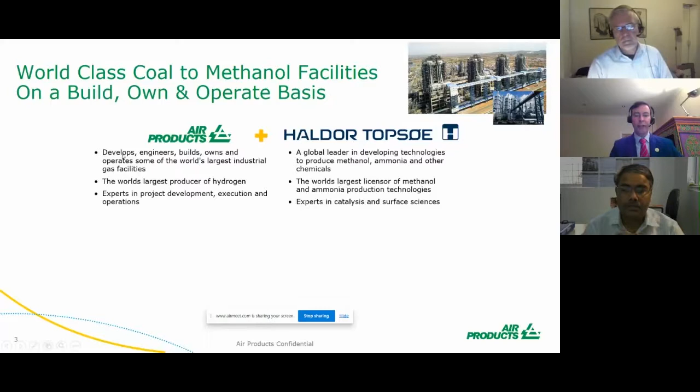I think you're very familiar with both the names of Air Products and Haldor Topsoe - we're both leaders in our own areas. Air Products is a significant producer of hydrogen worldwide. We own and operate some of the world's largest industrial gas facilities and are the largest producer of hydrogen and syngas in the world. So we are experts in developing projects, executing them, and operating the resulting plants. Haldor Topsoe, I'm sure you're all familiar with, is the world leader in many different technologies, but especially in products such as methanol, ammonia, and other chemicals. They're the world's largest licenser of many of these production technologies, and experts in catalysts and other solutions for this.

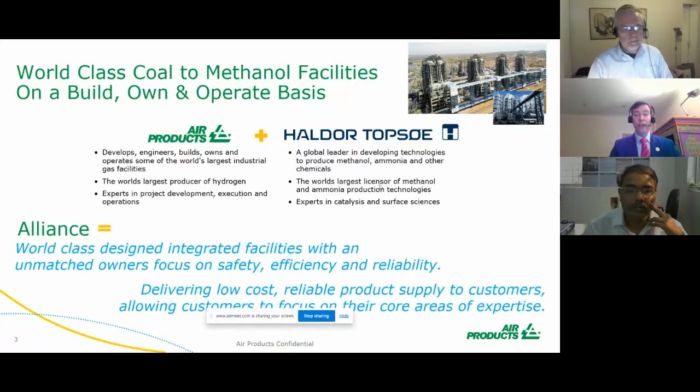Together, we have come together, and earlier this year, we announced a global alliance where Air Products and Haldor Topsoe will work together to deliver various methanol, ammonia, DME projects. It's a single-stop shop where customers can go to and result in a world-class designed integrated facility, taking the coal and delivering the finished product to the customer. So with what we believe is unmatched efficiency, safety, and reliability, all in a low-cost business model.

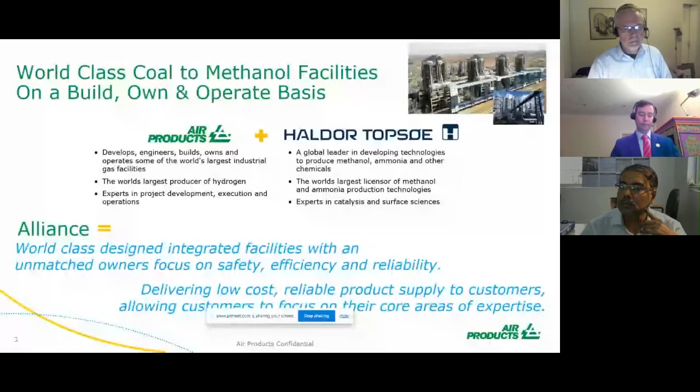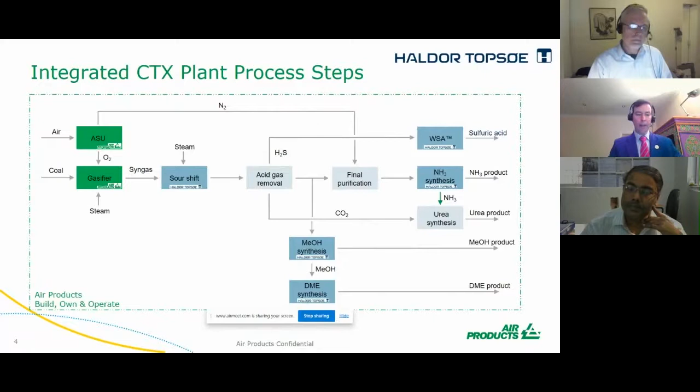You will have seen Air Products in earlier sessions talk about our unrivaled position in the gasification technology space. We offer this under what we call a build, own and operate business model, where we will take responsibility for the full financing of the project, full responsibility for the design and construction of the project, and we will then take full responsibility over a 25-year contract life for the efficient production of the end products. This gives customers many different benefits, which I won't go into here now, but my colleagues in a later session today will happily go into these details.

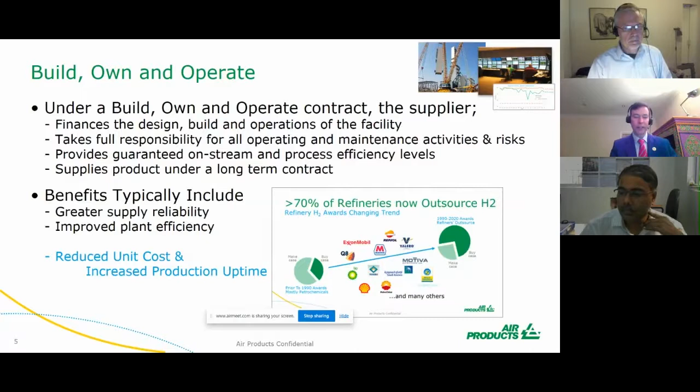We go on to the next slide. Finally, from Air Products, this is all a great story. It's easy to see on slides. We're actually executing this today.

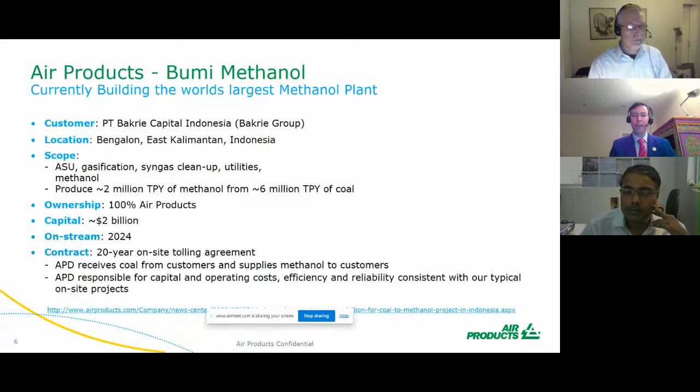Earlier this year, we announced one of the world's largest methanol plants to be built. It's being built in Indonesia under exactly this business model, 100% financed by Air Products, using Air Products gasification technology and Haldor Topsoe's methanol production technology to take 6 million tons per year of coal and produce 2 million tons per year of methanol for our customer. It's a $2 billion capital investment, all being financed by Air Products, and we expect it to be on stream in 2024. Now, if I hand over to my colleague, Per, he will take you through the Haldor Topsoe technology behind a lot of these opportunities.

What is methanol from coal? If you remember the slide Mark showed earlier, the methanol synthesis is only a small section of a coal gasification plant where the resulting product is methanol. Nevertheless, it is an important section in terms of overall efficiency and reliability.

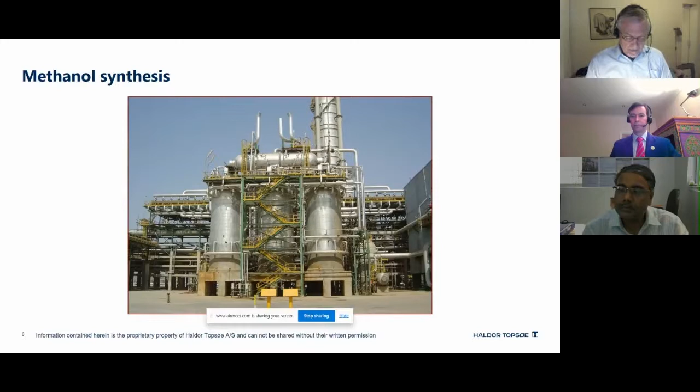The picture shows a methanol reactor section where 2 so-called boiling water reactors are operating in parallel as one reactor with a common steam drum on top. Topsoe has today plants in operation with up to 4 reactors in parallel, but there is no limit to the number. For a specific project, the number of reactors depends on the capacity and transport restrictions. Let us look at the full methanol synthesis section.

I hope you can see my pointer. The makeup gas from the upstream coal gasification section is entering at this point. The makeup gas contains hydrogen, carbon monoxide, and a small amount of carbon dioxide, and is slightly under stoichiometric in terms of hydrogen. The upstream units adjust this composition by adjusting the amount of shift from carbon monoxide to hydrogen and by removing carbon dioxide before going into the synthesis.

The gas is compressed, preheated, residual sulfur is removed in the sulphur guard, and then added to the recycle stream before entering the methanol reactor. The gas passes through the boiling water reactor in tubes filled with catalyst, which convert part of the gas to methanol close to equilibrium for the reaction.

The conversion is heavily exothermic. The reactor tubes are therefore surrounded by boiling water, removing the generated heat as steam. The reactor exit gas is cooled by preheating the feed gas, the recycled gas, and in a final cooler, where the main part of the methanol is condensed out as liquid so that it can be separated from the residual gas, which is recycled to the reactor.

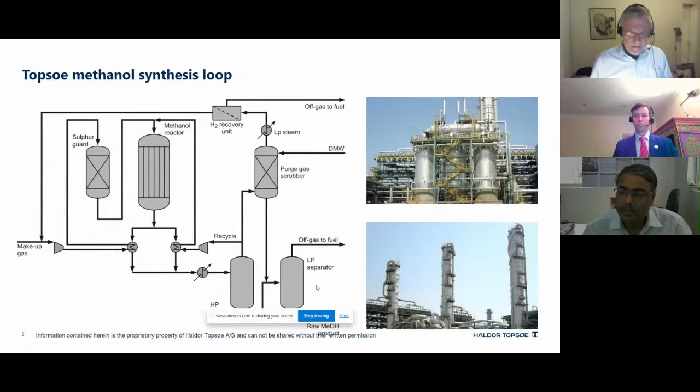What are the major advantages of this layout? The key component is the boiling water reactor. Synthesis gas from coal gasification is an extremely active gas for methanol production. Unfortunately, such an active gas also produces more byproducts if the temperature is not well controlled in the entire reactor.

Topsoe's axial flow reactor ensures best possible temperature control by simple pressure control of the boiling water surrounding the catalyst bed. The design ensures best possible utilization of the catalyst. There is no uncooled catalyst pocket, and all catalyst sees the full flow.

In terms of energy consumption, the solution ensures maximum recovery of the reaction energy in the form of steam, and the efficient temperature control and increased catalyst utilization reduces the required recirculation rate and thereby the loss of energy in the final cooler and recirculation compressor.

The very easy and safe temperature control provides very efficient byproduct control, both when the catalyst is new and very active, and later when it has deactivated. The efficient temperature control also enables use of highly active catalyst.

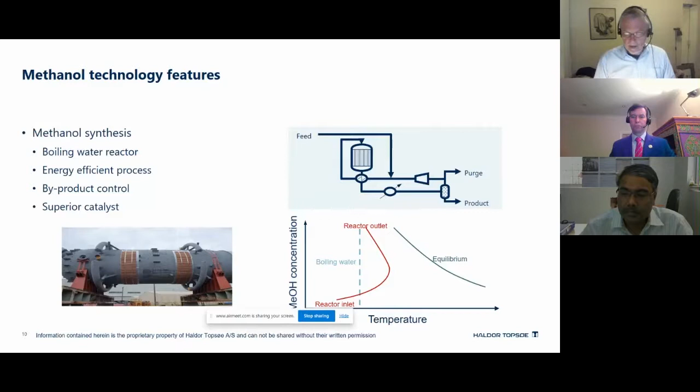Speaking of which, Topsoe has the superior methanol catalyst on the market. Topsoe's MK151 methanol catalyst using fence technology is superior. We have not stopped our development, and a new and even better catalyst is on its way to the market, so you can say improved performance in the future. The fence technology inhibits sintering, mainly maintaining activity for a longer time. The technology keeps the active copper crystal small, providing high activity with low byproduct formation.

The methanol synthesis produces a methanol stream which typically will need to be refined.

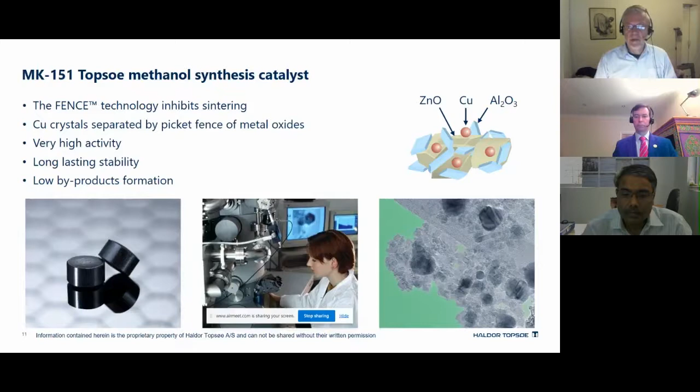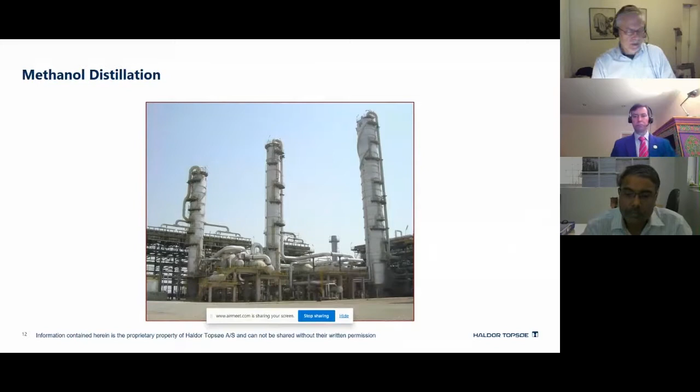This takes place in the methanol distillation section. The picture shows a typical world-scale distillation producing grade AA methanol. A simplified flow sheet for the section can look like this.

Common for most designs is that the methanol containing stream from the synthesis is stored in an intermediate tank before further refining. This is done to ensure stable operation. The first column, which we name stabilizer, is also common for most systems. It mainly removes light gases but can also be used for adjustment of water content and byproduct.

The design of the remaining part of the distillation section depends on capacity, energy consumption, and quality requirement. What is shown here is a large-scale grade AA distillation.

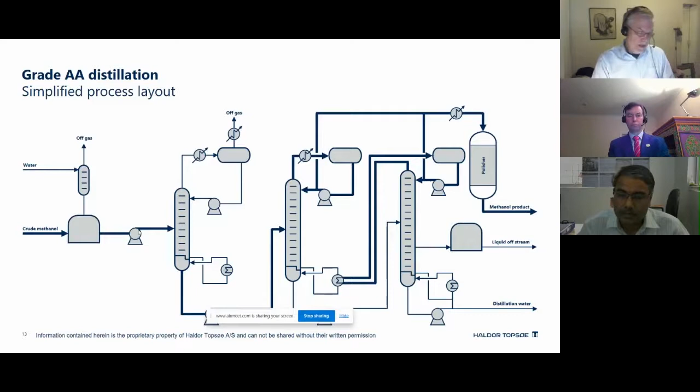Topsoe has an excellent reference list providing technology for methanol production based on coal gasification. Xianyang methanol plant in China is one example. It was started in 2010. It has a nameplate capacity of 2,000 metric ton per day using a single boiling water reactor.

The capacity is now 108%. Topsoe supplied basic engineering, detailed design and high pressure equipment, proprietary boiling water reactor, and catalyst.

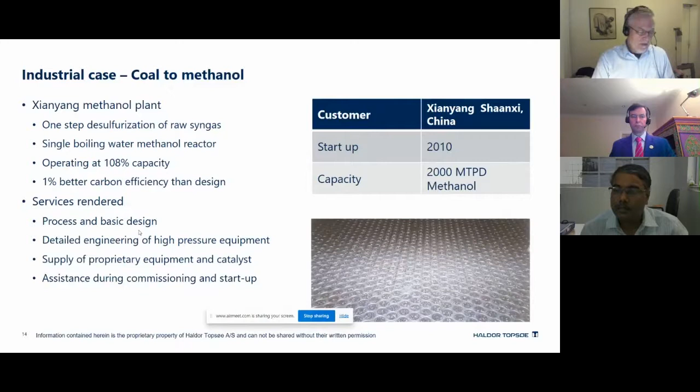Our reference list for our coal-based plants looks like this. It contains 11 projects which have been started since 2010.

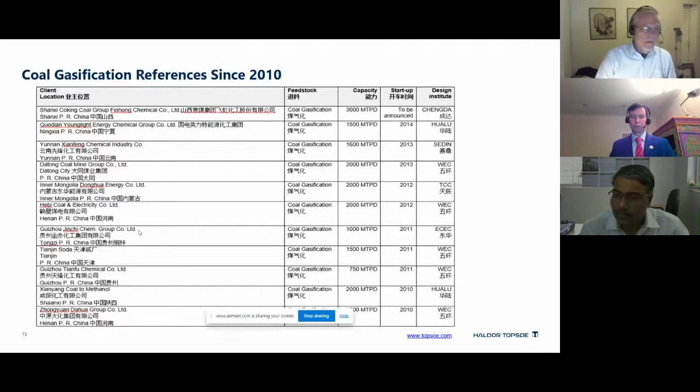Okay, so much for the methanol section. Topsoe can also provide technology for other sections in the coal gasification complex.

For example, the required shift section used to adjust the feed composition to the methanol synthesis loop. Topsoe can provide both a sour shift solution fed with sulfur-containing gas, or alternatively a shift section based on sweet gas where sulfur has been removed ahead. In any of the cases, we can provide basic engineering and catalyst.

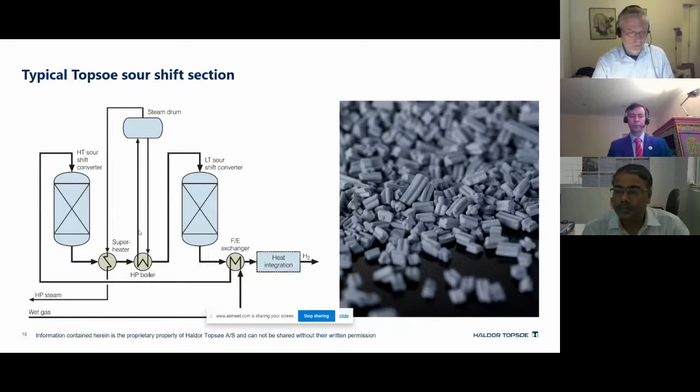We can also help to reduce sulfur emission. Coal typically has a high content of sulfur which has to be removed from the gas prior to methanol synthesis and prior to any other uses of gas from coal gasification. The section removing the CO2 is typically also removing the sulfur in an off-gas stream.

The sulfur in this off-gas stream can be converted into solid sulfur in a Claus plant, or as shown here, into sulfuric acid in a Topsoe WSA plant.

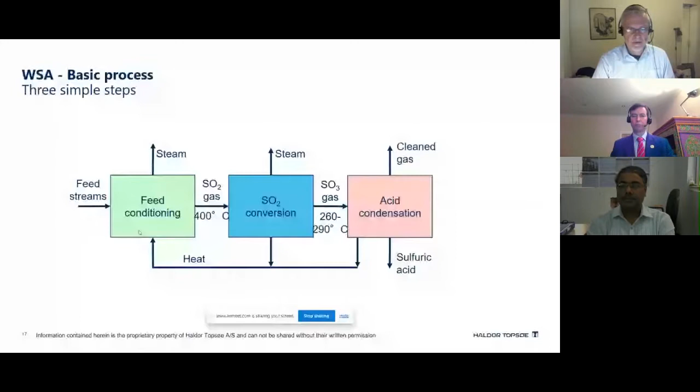It's not always that sulfuric acid is a requested product, but if that is not the case, Topsoe can also improve the Claus plant operation, as shown here. The combination of Claus and Topsoe's WSA improves the sulfur recovery from 97% to 99.97%.

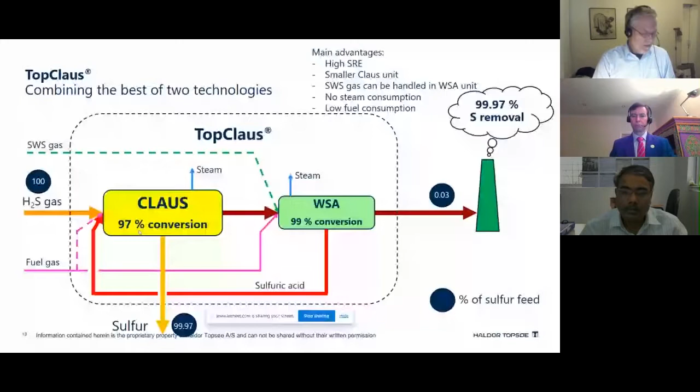Many thanks for that presentation, Mark and Mr. Dahl. What we'll do, we will take up the questions that are coming in, but we have another presentation coming in from Dr. Prakash Chavan. We will do the presentation first and then go to the questions. So I request your patience, please. Dr. Prakash, are you ready with your presentation? Yes, madam. Right, could you please start with your presentation then?

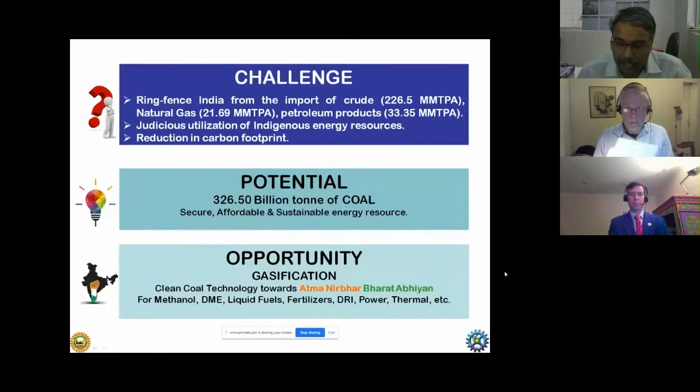Very good morning to all of you. I am presenting the program which is being pursued at CIMFR, Dhanbad, related to coal gasification as well as methanol generation. I think in the morning session as well as yesterday's session, several speakers have already highlighted the importance of Indian coal as well as the importance of gasification and challenges in connection with Indian high ash coal.

So I will not give much time to that part. Directly we can go to the strategy being targeted in India in view of the properties of Indian coal and challenges in Indian coal gasification.

So first of all, proper understanding of Indian coal is essential in view of its physicochemical properties and mainly ash properties, in order to properly select or develop the suitable gasifier, as well as determine the utilization strategy and pattern for its proper utilization.

Then another program which is chalked out is development of indigenous technologies. So as part of that program, already in the first phase, pilot scale gasifier development suitable for Indian coal is being pursued.

And the third program is related to comparison of commercially available technologies, various technologies, and indigenously developed technologies, and economic comparison of all these technologies in view of Indian coals.

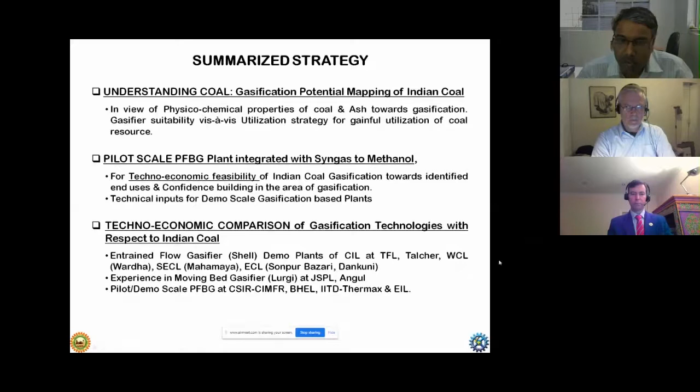So this is the overall program, we can say. This is divided in two parts. Already Niti Aayog has initiated activities, mainly

installation of commercial gasifiers, mainly entrained flow gasifiers, suitable for low ash coal as well as high ash coal after washing and blending. So few plants, commercial scale plants, will be installed at different mine mouth locations, and this particular program will give

feedback related to performance of the commercial technologies in view of Indian coals. Parallelly, an indigenous gasifier development program is also there. So in first phase, 4 organizations, including CIMFR, are installing pilot scale facilities.

Already we have installed it, and it will be integrated with syngas utilization for methanol at the downstream. Input from this particular phase will be utilized for demo scale development as well as commercial plant development. So finally the outcome will be indigenous technology development for gasification as well as methanol generation.

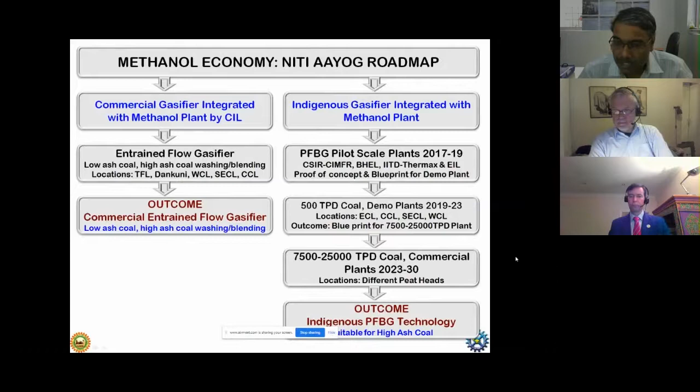In this direction, our institute CSIR-CIMFR has initiated a very big, multifaceted program. The first important activity is understanding Indian coals towards gasification, so that we can get a correct idea about the suitability of gasifiers as well as utilization pattern. Then development of an Indian fluidized bed gasifier suitable for high ash Indian coals.

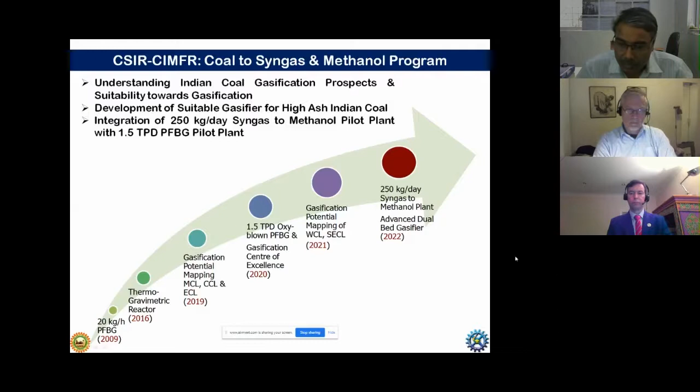The third activity is related to installation and integration of around 250 kg per day syngas to methanol pilot plant with the newly developed fluidized bed gasifier plant. So I will discuss these 3 activities in short.

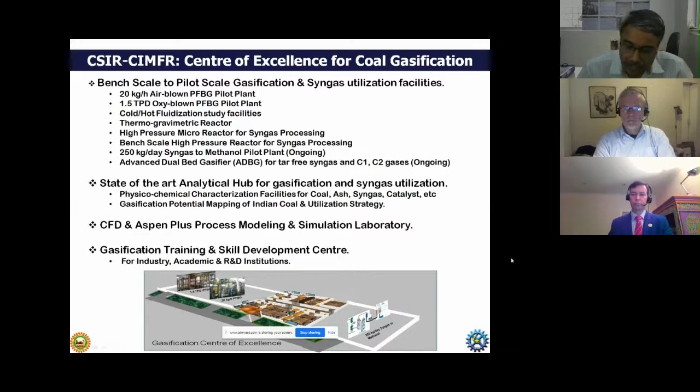Apart from this, we have established a Center of Excellence for Coal Gasification and allied activities, well equipped with various pilot plants and state-of-the-art analytical facilities towards gasification, as well as modeling related laboratory, and even a training and skill development center.

So coming to the first activity, understanding of Indian coal, we have already completed this particular program, that is gasification potential mapping of 3 subsidiaries of Coal India - MCL, CCL and ECL. Around 36 mines we have covered under this program, and we have developed a characterization matrix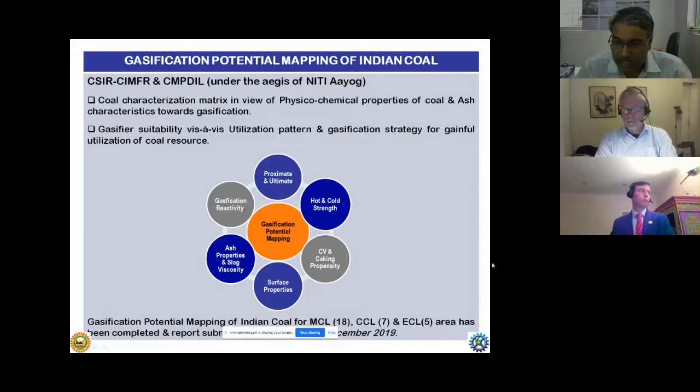consisting of several physico-chemical properties as shown in this particular slide. From this characterization matrix, we have developed utilization patterns as well as criteria for selection of the suitable gasifier. We have also suggested the utilization options, or we can say blending and washing patterns necessary for utilization

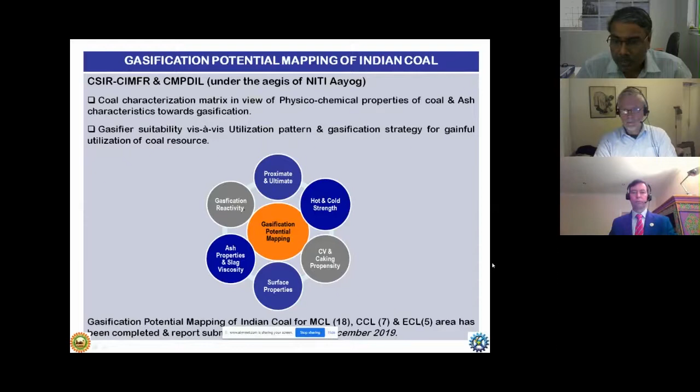through different types of gasifiers. And this particular report we have submitted to Niti Aayog for further steps to take in view of Indian coals.

From this particular study, we can say that these 4 important parameters or properties are very much important in view of Indian coals, mainly ash content and ash properties, including ash fusion temperature or ash composition, because we are aware that Indian coals have high ash content as well as high ash fusion temperature.

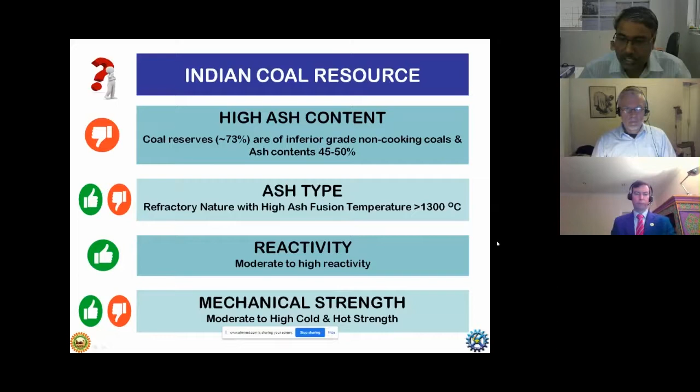Fortunately, Indian coals have good reactivity as well as mechanical strength, which is essential for a few types of gasifiers. Based upon this particular study, we have suggested criteria for selection of gasifier for Indian coals based upon ash content as well as ash properties, which are essential mainly for entrained flow gasifiers.

And when we think about moving bed gasifiers, mainly mechanical strength and reactivity properties are necessary. Again, depending upon ash content, blending and washing steps we have suggested. But for fluidized bed gasifiers, which are suitable to handle high ash coals also, we need to think about reactivity and mainly agglomeration related aspects, ash fusion temperature and ash composition.

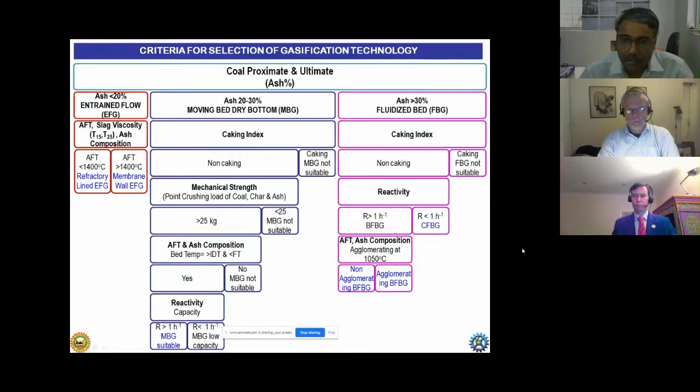So in detail, strategy for selection as well as utilization pattern we have suggested under this particular report. And we have chalked out three options. Suppose for a particular mine, we can go for any type of gasifier, but if we go for entrained flow gasifier with high ash coal, definitely washing or blending will be necessary to bring down ash content within acceptable limits.

And certain issues related to capex opex we need to consider when we go for entrained flow gasifier. Again, in view of Indian coals, since ash fusion temperature is on the higher side, we need to concentrate mainly on membrane based technologies like Shell or similar type of technology, because higher gasifier temperature will definitely be necessary to achieve desired viscosities. So definitely high temperature entrained flow gasifiers we need to consider here.

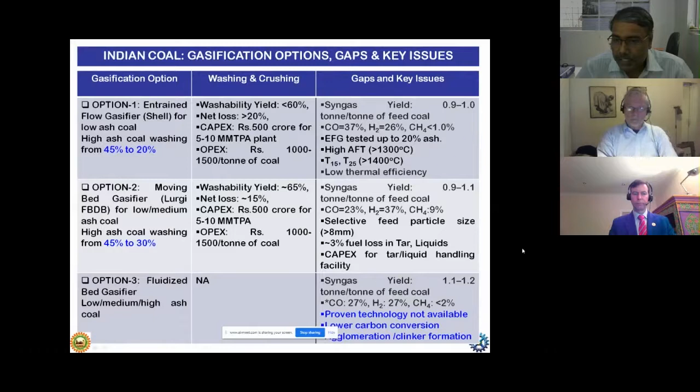Again, suppose when we consider moving bed gasifier, in that case also we need washing or blending to some extent. But under this particular technology, one issue is related to selective feed particle size as well as tar generation and liquid product generation.

So it will definitely attract capex for washing as well as for tar and liquid product handling. When we think about fluidized bed gasifier, it can definitely handle high ash coals directly, but proven technology is not available under this particular category. We are aware that another issue related to fluidized bed is lower carbon conversion.

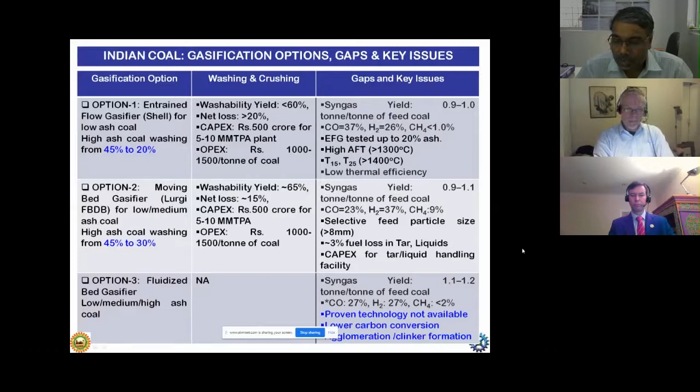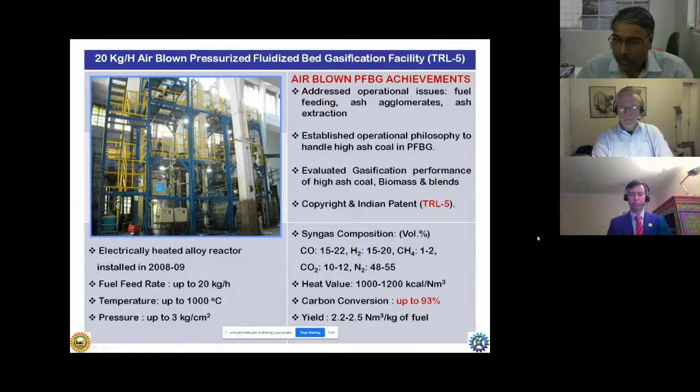So in this aspect, we initiated the program for development of a suitable fluidized bed gasifier for high ash Indian coals long back, and in 2009 we installed this fluidized bed gasification facility. After testing various coals from different coal fields of India in this facility for 10 years, even coals as well as their blends with biomass, we achieved success in developing the operational philosophy to handle high ash coals.

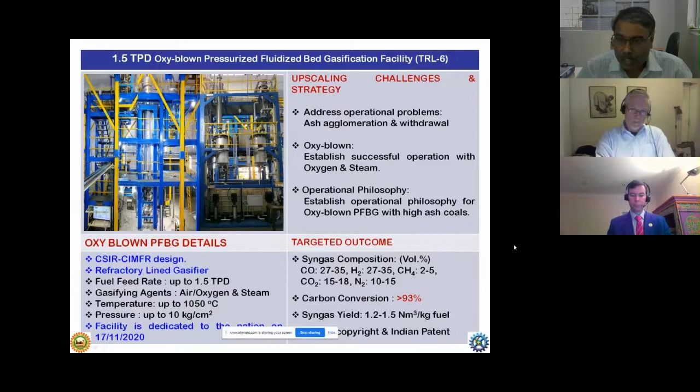Now we have already upscaled this facility to 1.5 tons per day coal handling capacity, and recently, on 17th of November, this facility was inaugurated by the Honorable Minister of Science and Technology. We have now conducted a trial run in this facility, and we have achieved syngas composition, mainly CO and hydrogen, in the range of 12%. This was just a trial run.

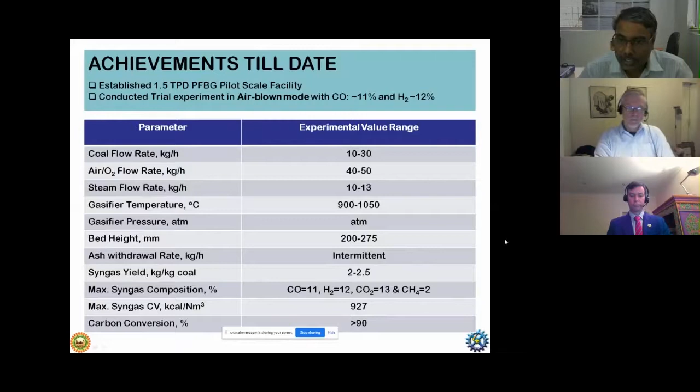This was in air-blown mode. Now, the next target is to establish operation in oxy-blown mode with high-ash Indian coals and develop operational philosophy to handle these coals, and subsequently understand the gasification prospects as well as generate techno-economic data necessary for the demo scale and commercial scale plant development program of NITI Aayog.

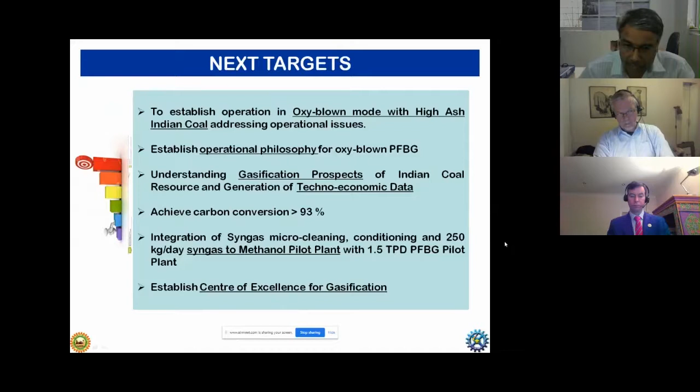And simultaneously, we are in the process of installing a 250 kg per day syngas to methanol pilot plant and integrating it with this newly developed 1.5 TPD fluidized bed facility, as well as strengthening our developed center of excellence for gasification in all respects necessary for gasification and syngas utilization.

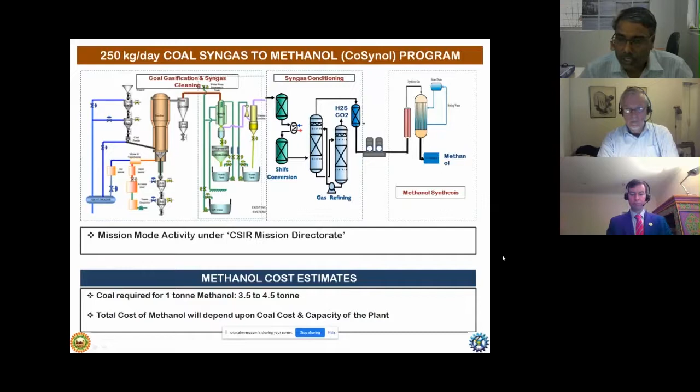So we are already in the process of developing syngas micro-cleaning and conditioning. This will be a completely in-house developed process for cleaning and conditioning of the syngas, as well as syngas to methanol conversion. It will be integrated with the newly developed PFBG facility, and will give a complete solution for coal to syngas as well as syngas utilization for methanol.

At the outset, we can say this program of development of an indigenous fluidized bed gasification pilot plant is a milestone achievement towards the methanol economy program of NITI Aayog, as well as the Atmanirbhar Bharat Abhiyan of the Government of India. From this development, we can get an idea about the gasification potential and techno-economics related to Indian coal gasification, as well as their utilization prospects towards various downstream applications like chemicals, methanol generation, fertilizers, and other applications. This development will be utilized for the demo scale program of NITI Aayog.

So this is the overall picture of our in-house program at CSIR-CIMFR. Thank you, madam.

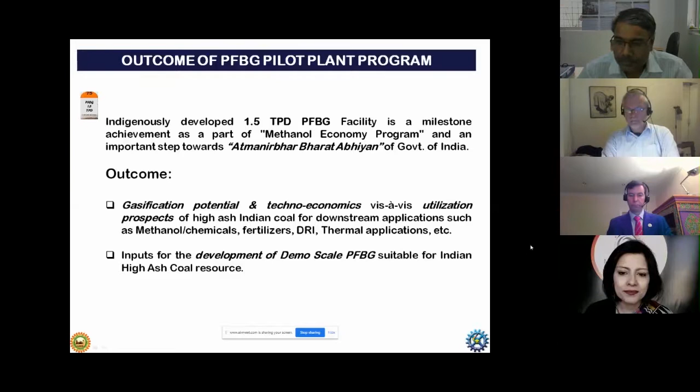Thank you, Dr. Chavan, for your presentation. Of course, there is a lot of promise in these new technologies, and there has been debate on how we can best utilize these, and what will be most suitable in India's conditions, given the kind of coal we have and given the fact that we really haven't had a lot of underground coal gasification in our country so far.